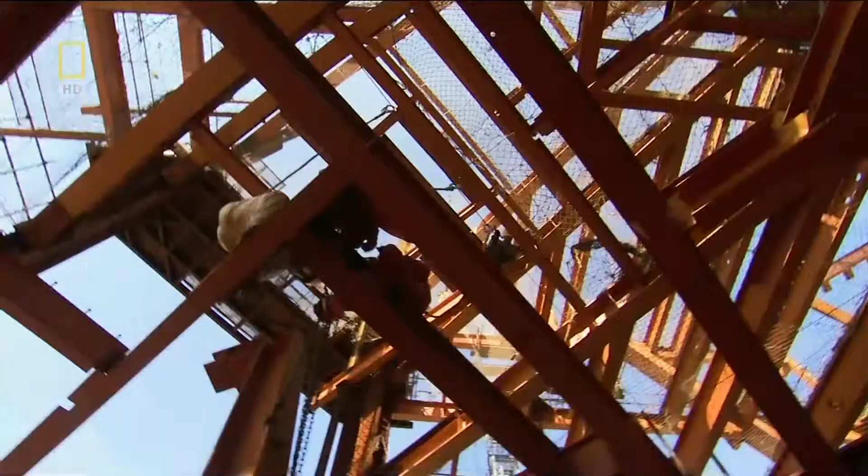Take 60,000 tons of steel, 260,000 cubic meters of concrete, 2,000 dedicated Chinese workers, and some of the best design brains in the business. And this is what you get. The Shanghai World Financial Center. Nearly 500 meters tall, and every meter state-of-the-art.

Designed to be strong enough to stand up to killer typhoons and powerful earthquakes, and to withstand the ultimate threat, by a world-renowned engineer still haunted by his most famous building's horrifying fate. I don't think I ever got through the experience of 9/11. When this megastructure's finished, the world will marvel at a skyscraper like no other, a dazzling icon of China's rise to power.

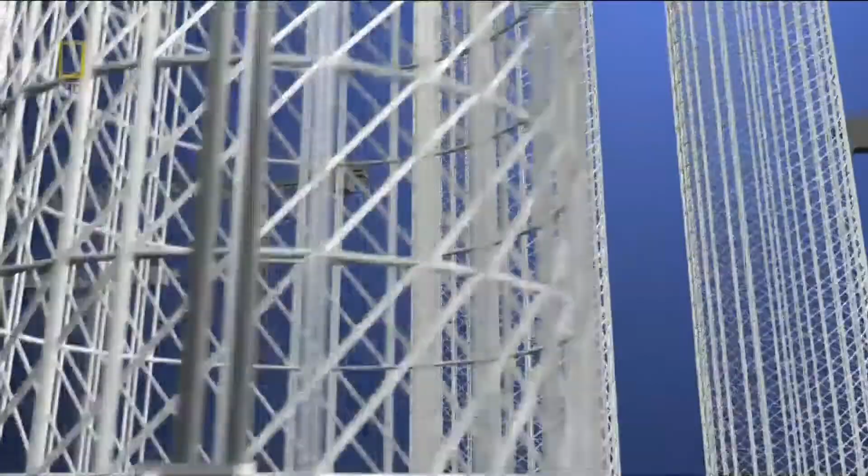China, the world's fastest growing economy. Shanghai, China's biggest city, the financial heart of its economic miracle. Along the Huangpu River, grand old buildings evoke the jazz age of the 1920s, when foreign powers had made Shanghai their Asian financial headquarters. And Shanghai's highest building was just 9 stories tall. That was then. This is now.

Welcome to Pudong, Shanghai's hottest real estate, ground zero of China's economic clout. A forest of skyscrapers proclaiming Shanghai's drive to become Asia's financial capital. Pudong's icon, the Jinmao Tower, a state-of-the-art office building and hotel completed in 1998. 88 stories high, 5th tallest building in the world.

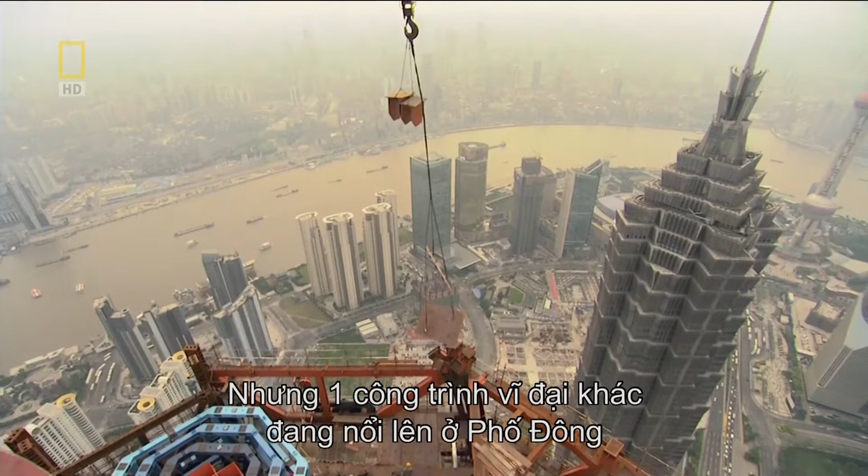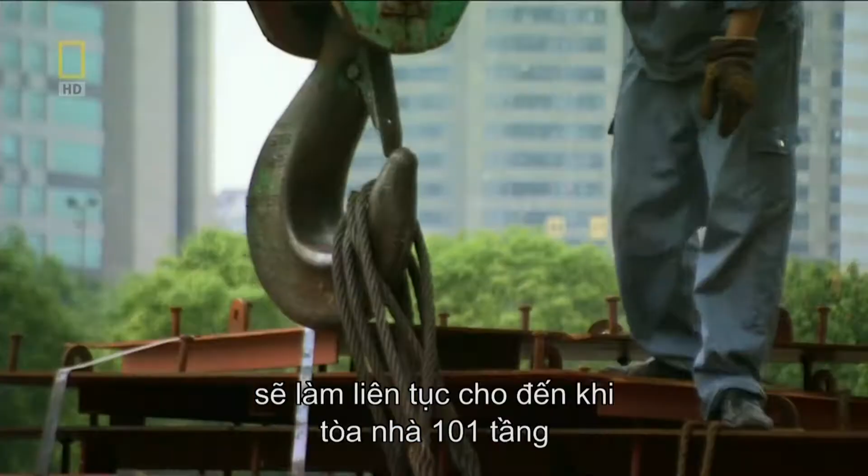But there's a new megastructure rising on Pudong's block. It's not even finished, but already it's putting the Jinmao Tower in the shade. 2,000 workers are toiling day and night to build the Shanghai World Financial Center. And they won't stop until it's 101 stories tall, soaring nearly 500 meters into the sky. The tallest building on the Chinese mainland, and the 3rd tallest building in the world.

17,000 people will work inside its 70 office floors, topped by a 14-story luxury hotel, and crowned by the world's highest observation deck. Building anything this big is not for the faint of heart. In New York, some of the world's best architects and engineers forgot about sleep and tackled the toughest challenges planet Earth can throw at a skyscraper. And even deadlier human threats.

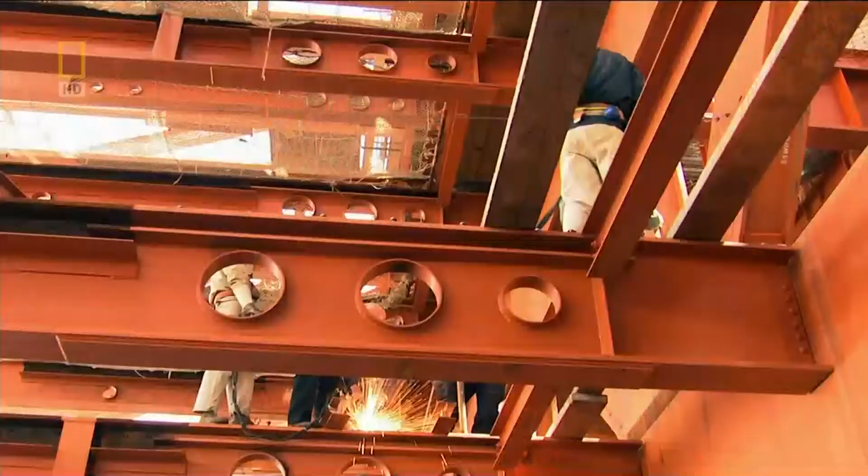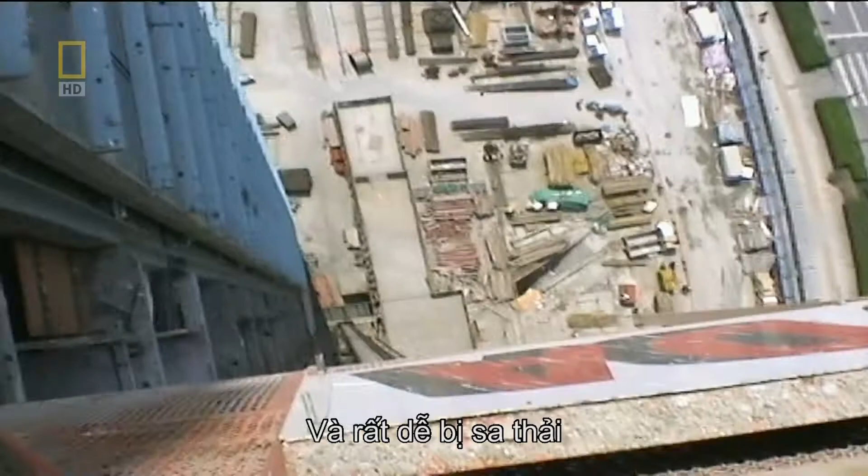Now, in Shanghai, a team of construction workers is turning the designer's vision into a reality. It's early morning, but construction isn't starting because it never ends. On this site, work goes 24/7. These workers are just the day shift, and their commute is not for the timid. The only way to get to work is in lifts bolted to the outside of the building. It's a great view, if you don't mind looking down.

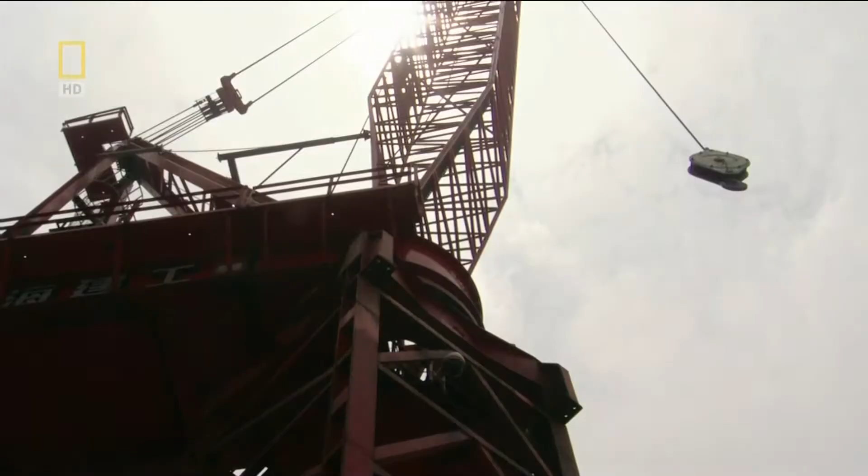Heights don't bother this man. Chen Shuifu works even higher than the top floor workers. 40 meters higher. He runs the Favelle Favco M900D, one of the most powerful high-rise construction cranes in the world. Without Chen Shuifu and his crane, this megastructure would still be a hole in the ground.

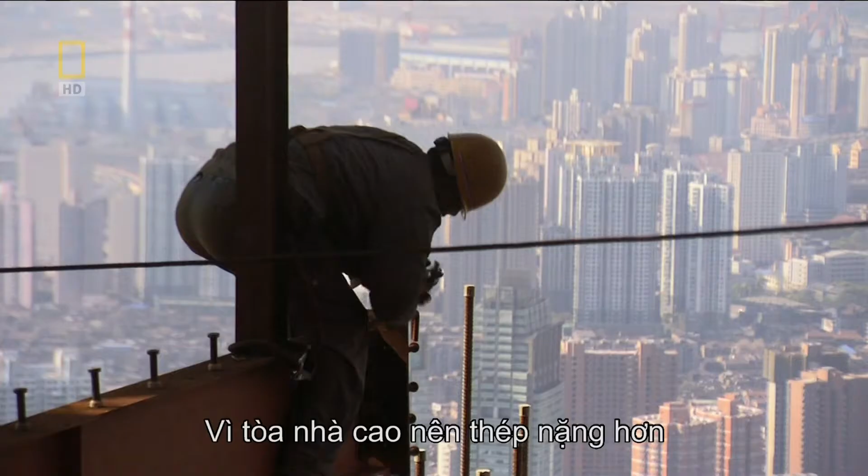Because building it starts with steel, lots of steel. It takes 650 tons to build just one floor. That's the weight of 90 elephants. Multiply that by 101 floors, and you get over 65,000 tons of steel. That's 10 times heavier than the Eiffel Tower. And as the building gets taller, steel has to go higher, a lot higher.

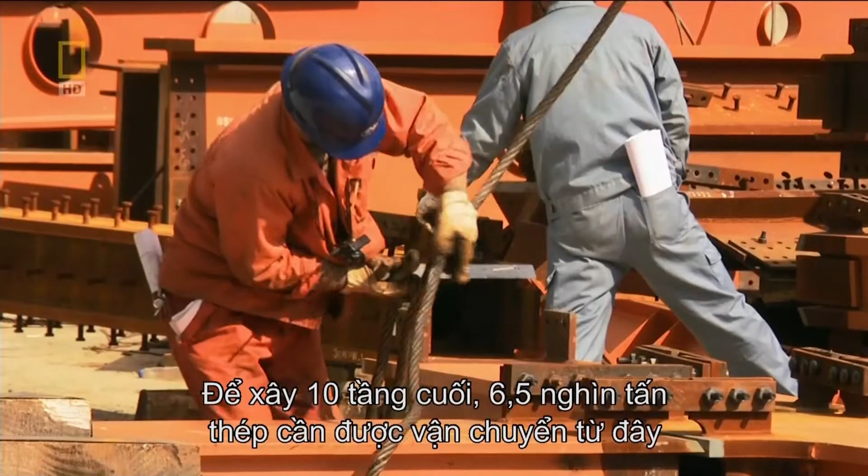Construction's now past the 400-meter mark. Up to the 91st floor, only 10 floors short of the top. To build those final 10 floors, 6,500 tons of steel need to get from here to there. And that's where Chen Xuefu comes in. He and his fellow crane operators hoist multi-ton beams over 400 meters. Their shifts run day and night, and no one ever knocks off early.

The World Financial Center is the biggest project I have worked on. Usually we start work at 6 a.m. We bring some bread and noodles for lunch. We finish work at 6 p.m. So we work a total of 12 hours a day.

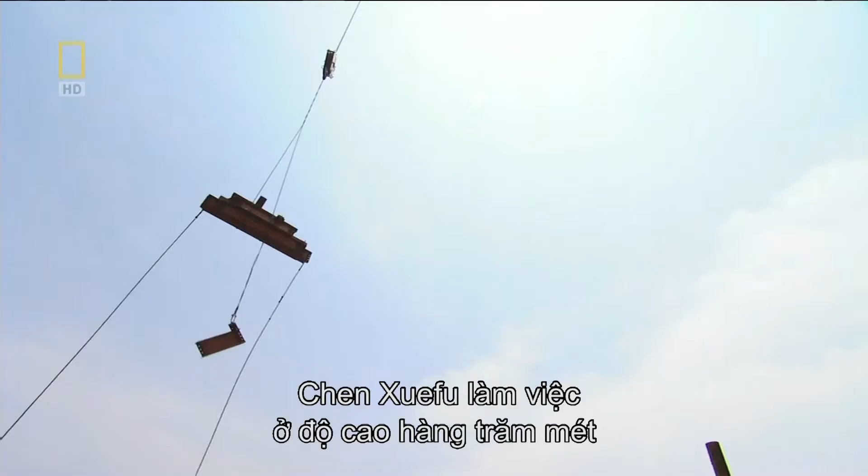Now that the financial center's over 90 stories high, Chen Xuefu does his job hundreds of meters in the air. But when construction started, he worked just above street level, his crane anchored to the basement. How does a 250-ton crane stay higher than the skyscraper it's building? That's one of the most amazing things about the M900D. This mega crane doesn't just lift enormous beams of steel. It can also lift itself.

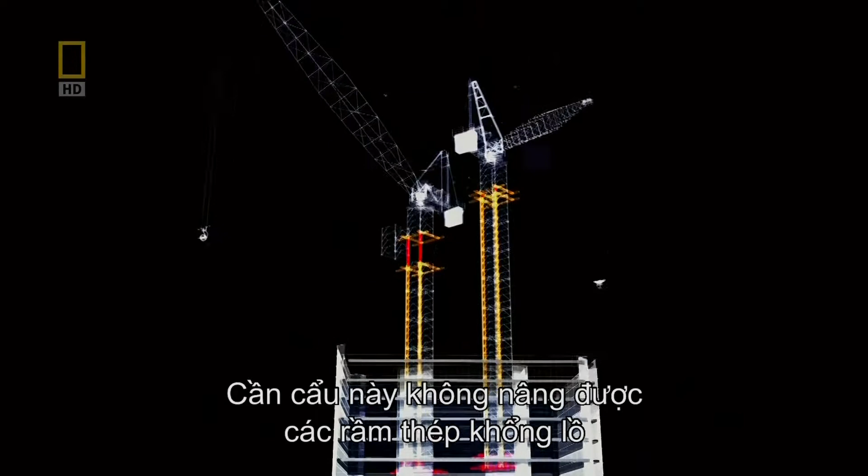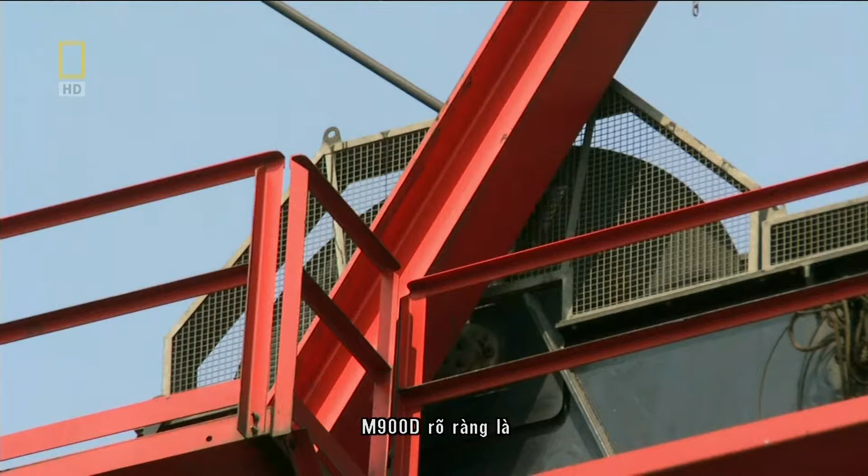As the building rises, it rises too. By jacking up its tower with powerful hydraulic rams and inserting new tower sections. To do that, those jacks have to push a 250-ton crane 40 meters straight up. But to work at these heights, a crane needs to be more than just strong. It has to be fast and smart. The M900D definitely fits the bill. These cranes don't flinch at lifting 32-ton loads 400 meters up at 36 meters per minute.

In fact, 400 meters is child's play. The M900D's hook hangs from a wire rope that's 750 meters long, the length of 10 jumbo jets. And this crane has a brain. Its drive system knows when there's nothing on the hook and gives the okay for the hook to go full speed to the ground.

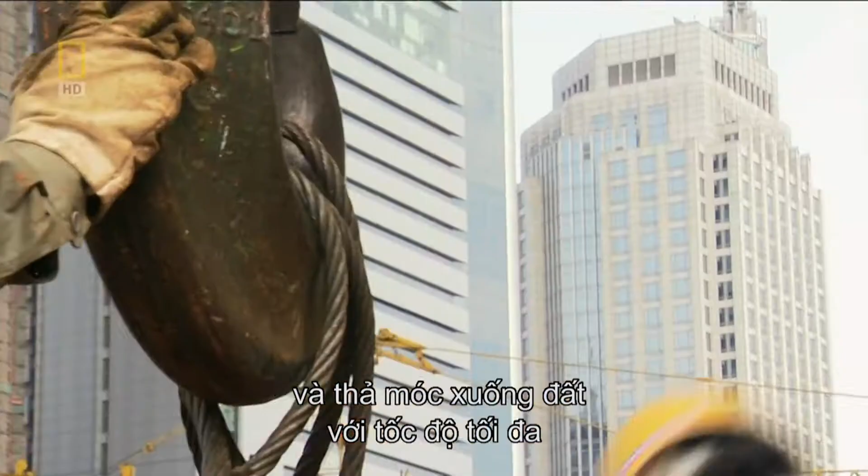When the hook's got a full load, it's a different story. The motor switches to full power and pulls huge hunks of steel hundreds of meters above the ground. Every time he lands a beam safely on top, Chen Xuefu can relax for a moment. But the new arrival gives others plenty to worry about.

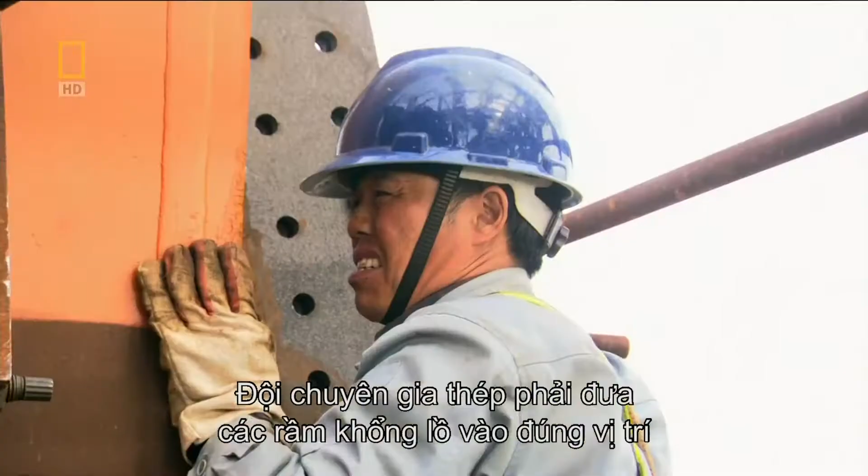A team of expert steelworkers must now wrestle the giant beams into place and bolt them together. One of those steelworkers is Zhang Shouliang. He spent years working at one of China's biggest shipyards, with both feet firmly planted on the ground. When he came to work at the World Financial Center, he found out fast that 400 meters up in the air, working with steel, calls for nerves of steel.

At the beginning, I was nervous, and my hands and feet were shaking. After a while, I managed to overcome it.

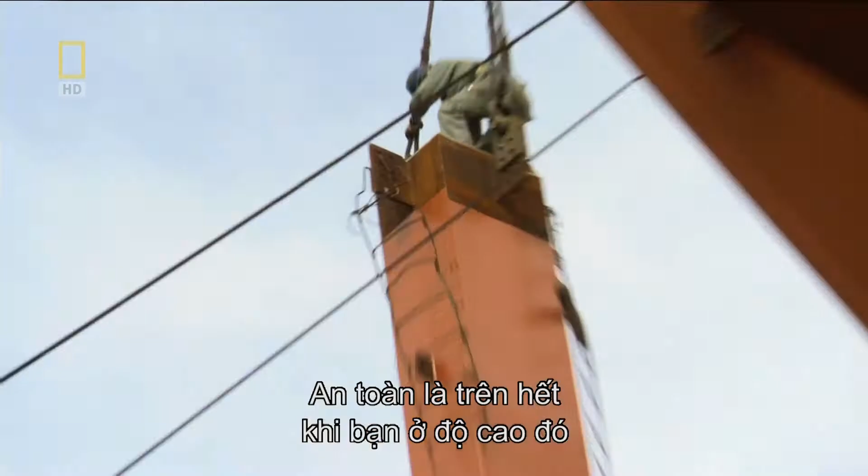To someone starting this job, I would say safety first on the first day. Be careful when climbing up and down the ladders and scaffolds. Safety is first and foremost for you at this height. Because only when you are safe can your family be happy. If you have an accident, your whole family will bear the consequences.

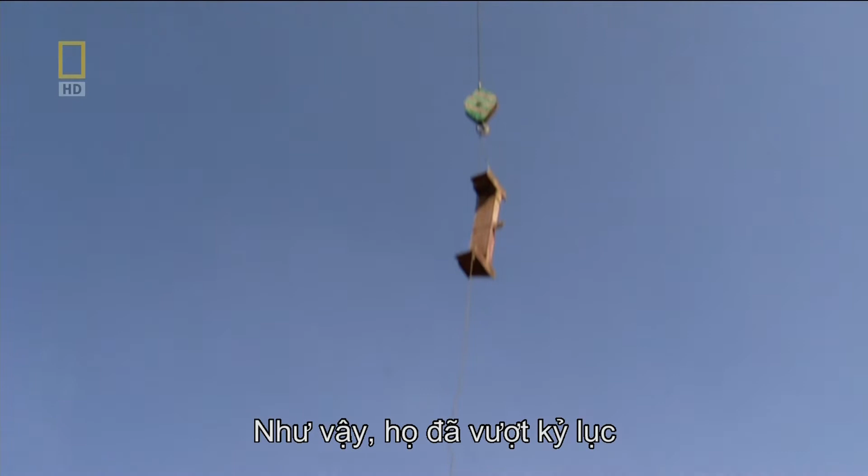As the workers pass 400 meters, they're heading into unknown territory. In mainland China, no one has ever built as high as they are going. And the Chinese building code stops at 350 meters. They're literally moving off the charts. And there's still nearly 100 meters to go. As they close in on success, it's hard to imagine how many challenges blocked their path, and that this magnificent structure once seemed doomed to fail.

1990. China's central government announces plans to transform an aging Shanghai suburb called Pudong into a gleaming financial center. And Japanese real estate tycoon Minoru Mori gets an idea. Mori envisions a mega building that will dominate the new Pudong skyline and rank among the tallest buildings in the world. To pay for his vision, Mori raises a whopping $625 million. To design it, he turns to some long-trusted associates, the world-renowned New York architects of Kohn Pedersen Fox.

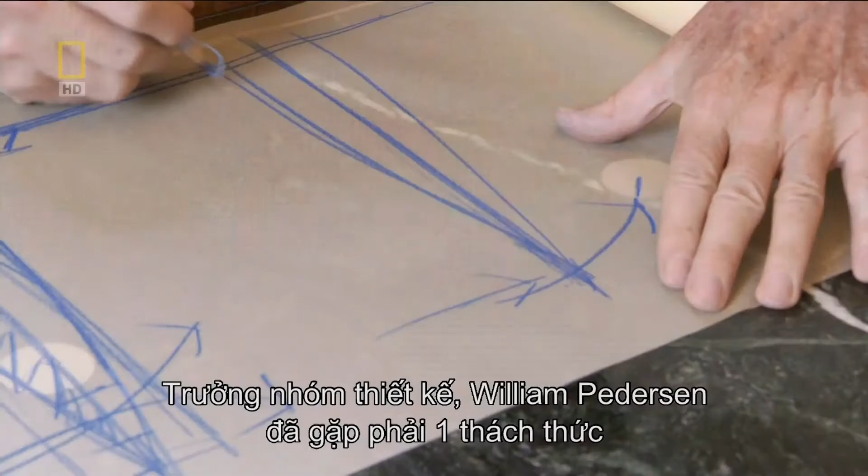Lead designer William Pedersen had a challenge on his hands. This was going to be a super tall building which had to deal with the very interesting issues of the connection of earth and sky, which a tall building has to do. It needed to be a building of great nobility. Pedersen discovered that in ancient Chinese culture, earth was square and sky was round. His design blended both shapes into a soaring 101-story prism of steel and glass, lifting the eye and the soul from the earth to the heavens.

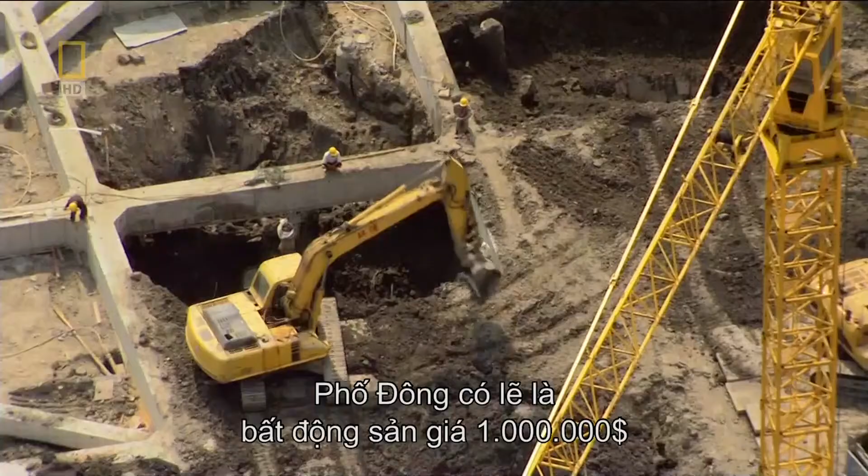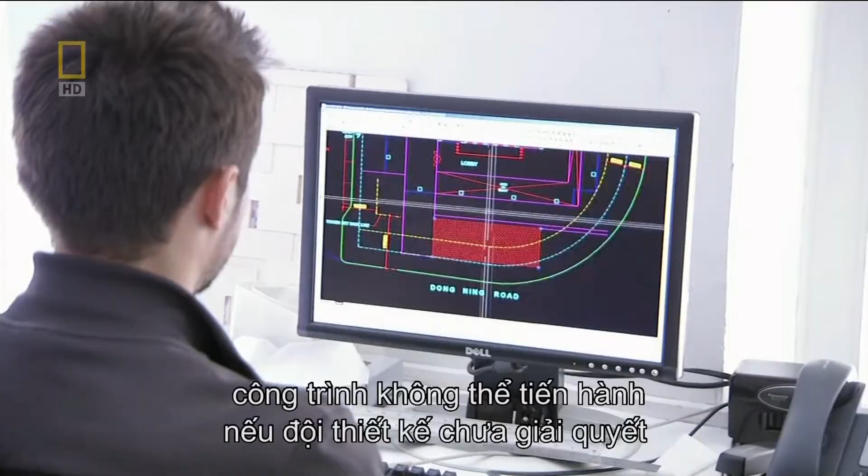It was lovely, but no one could build it until its designers solved one big problem. Pudong may be million-dollar real estate, but it's also a very bad place to build a very tall building. River water saturates its soil, turning it into unstable mud. When building crews pump the water out, the land sinks. Since 1920, parts of Shanghai have sunk almost 2 meters. At Kohn Pedersen Fox, senior designer David Malott knew construction couldn't proceed until the design team successfully grappled with Pudong's less than ideal geology. Shanghai is all alluvial soil, so there's not quite the bedrock that you would find in Manhattan. Manhattan, you go down one floor and then you're sitting on granite.

The team's solution: if they couldn't build on granite, they'd use a simple but effective device to anchor their skyscraper in mud. Friction piles. 2,000 steel rods driven 80 meters into Pudong's swamp. The deeper the piles push into the mud, the harder the mud pushes back, gripping the rods tightly, creating a stable foundation. Floating the World Financial Center like a ship on Pudong's waterlogged soil.

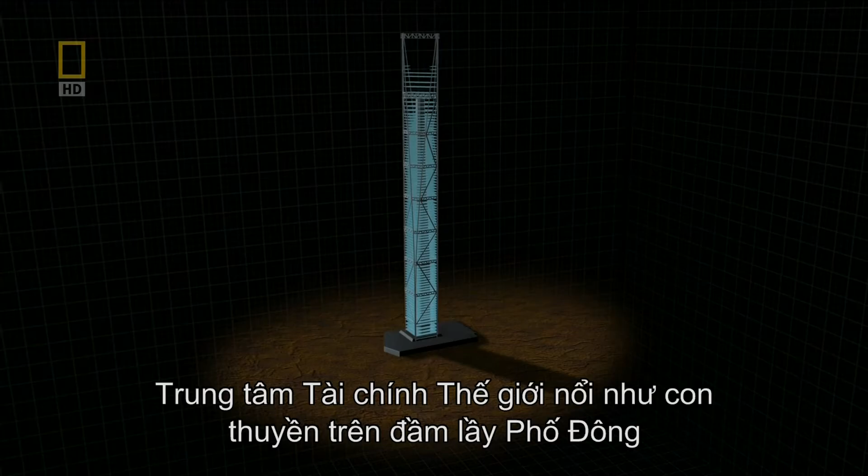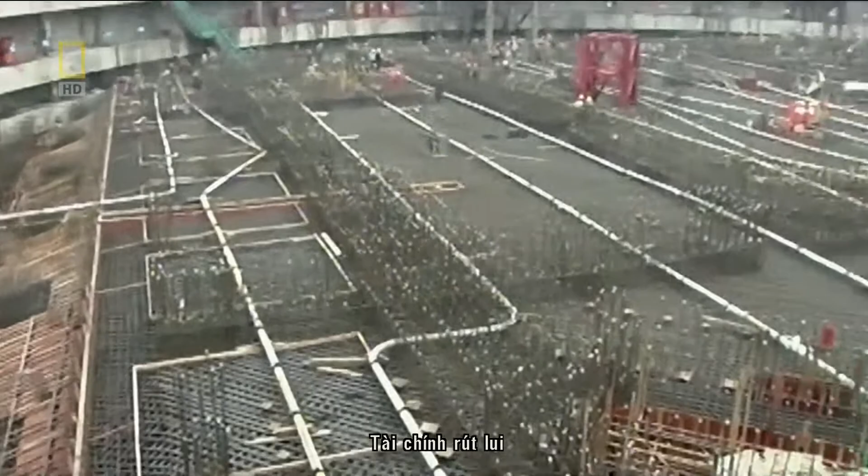1997. Construction of the Shanghai World Financial Center begins. But no sooner is the foundation finished than disaster strikes. 1997. Asia's overheated economies collapse. The meltdown paralyzes the Japanese banking system and suddenly floods the Asian real estate market with unoccupied office space. The last thing China needs is a $625 million empty office building. Some of the financial center's investors pull out. Construction grinds to a halt. 5 years pass. What was to be the pride of Pudong appears destined to remain a gigantic hole in the ground.

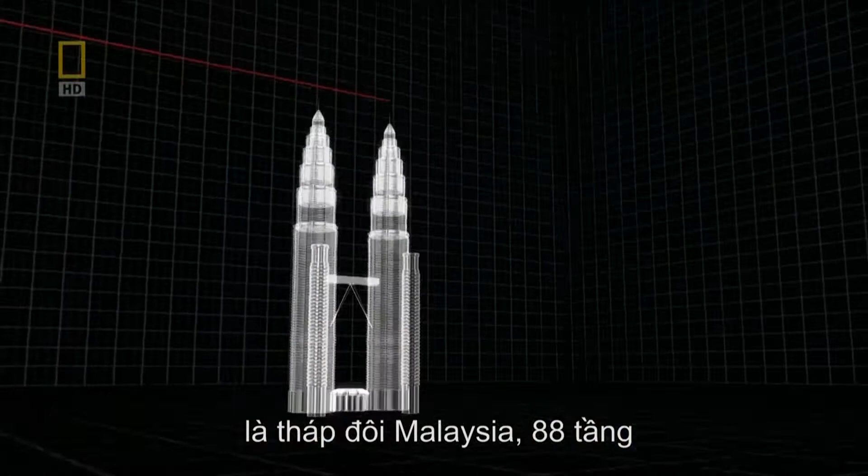But by 2003, Asian economies are roaring back. Minoru Mori finds new investors for his mega building. In New York, the financial center's architects get another call. The good news, their masterpiece is back on track. The bad news, its design no longer works. When construction started in 1997, the world's tallest building was Malaysia's Petronas Towers, 88 stories high. The 95-story World Financial Center was on track to take the title.

But by 2004, a new skyscraper, Taiwan's Taipei 101, soared 101 stories, or 508 meters, above the Earth. Minoru Mori told his architects, Shanghai's tallest skyscraper must rival Taipei 101. No problem, except the World Financial Center's foundation was already built to support only 95 stories. Adding 6 more stories meant extra weight pressing down on a foundation that couldn't support it.

And that wasn't all. China was now the host of the 2008 Olympics. Minoru Mori didn't just want a taller building. He wanted it finished before the world turned its eyes on China in 2008.

In New York, senior designer David Malott went back to the drawing board and stayed there well past closing time. You have to be 100% dedicated to the task, for sure. Across town, legendary structural engineer Leslie Robertson and his team rolled up their sleeves and went to work.

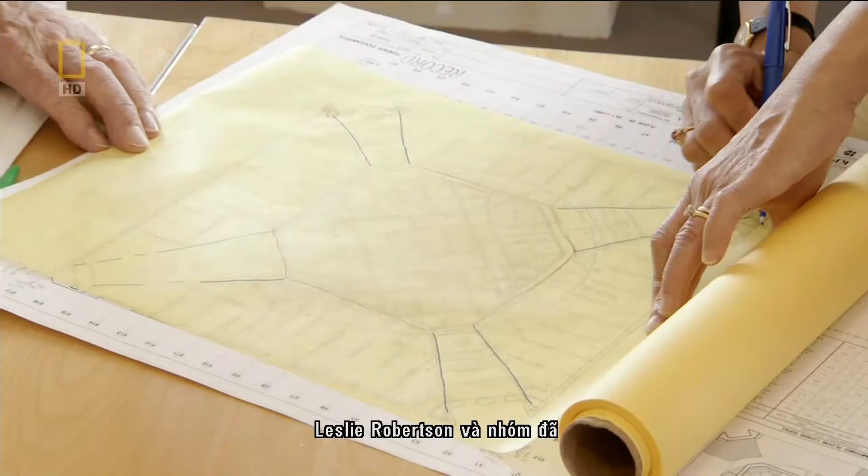Our challenge was to come up with a building that was larger, taller, so it needed to be stronger and it needed to be lighter. It had to stand on those existing foundations. Robertson's larger, taller, lighter solution was an engineering triumph.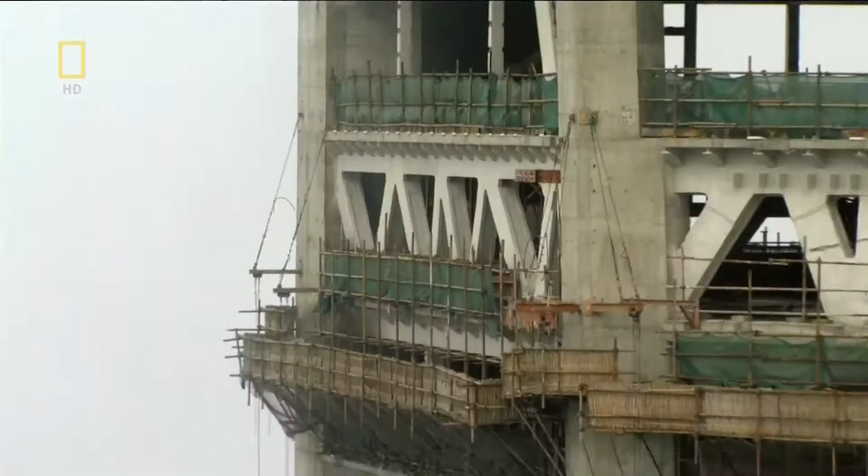Its secret, modular design and the outrigger truss, steel beams radiating out from a concrete core. Attached to a diagonal braced frame, a modular design requiring less steel to build, and repeating itself every 12 stories.

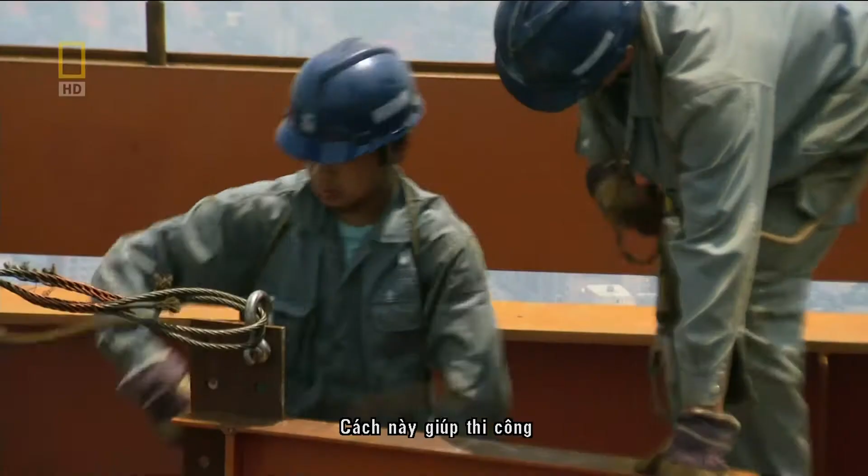What looked like a single 101-story building would actually be a series of 12-story buildings stacked on top of one another. Easier and faster to build, giving the builders a shot at finishing before the 2008 Olympics. So this way we got faster construction and more economical construction while maintaining structural integrity, robustness, and all those good things.

June 2007, 4 years after construction restarted. Thanks to its modular outrigger truss design, workers are building the World Financial Center at a rate of 1 floor every 3 days. At the top, the steel crew bolts in floor plates, completing the skeleton of the 91st floor.

Meanwhile, the cranes are lifting a much lighter, but critically important, load to the 90th floor, where another team begins the back-breaking task of installing 10-meter lengths of rebar over the steel floor plates. Rebar stands for reinforcing bar, and it's used in buildings all over the world to reinforce concrete.

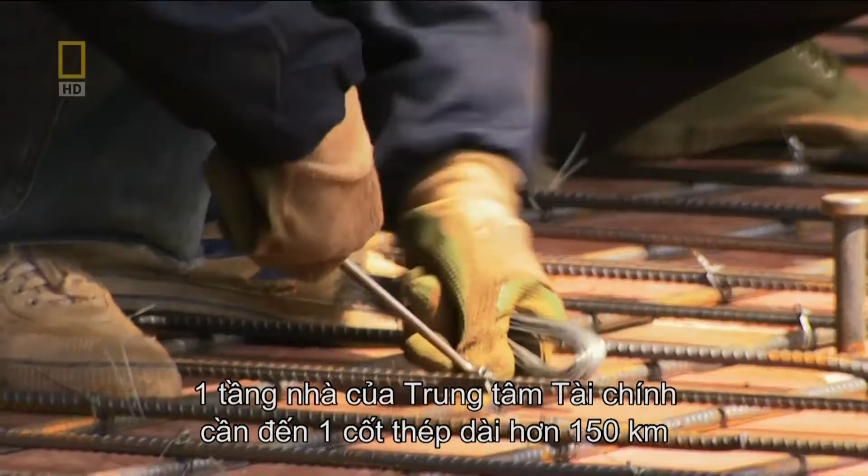It takes over 150 kilometers of rebar just to cover one of the financial center's floors. That's over 15,000 kilometers for the whole building. If you laid that much rebar end to end, it would reach to the International Space Station and back 19 times. Next step, pour the concrete.

90 floors below, what looks like a giant praying mantis seems ready to attack the World Financial Center. In fact, it's a concrete pumping machine. When the rebar's ready, workers 400 meters high will need massive amounts of concrete pumped up to them.

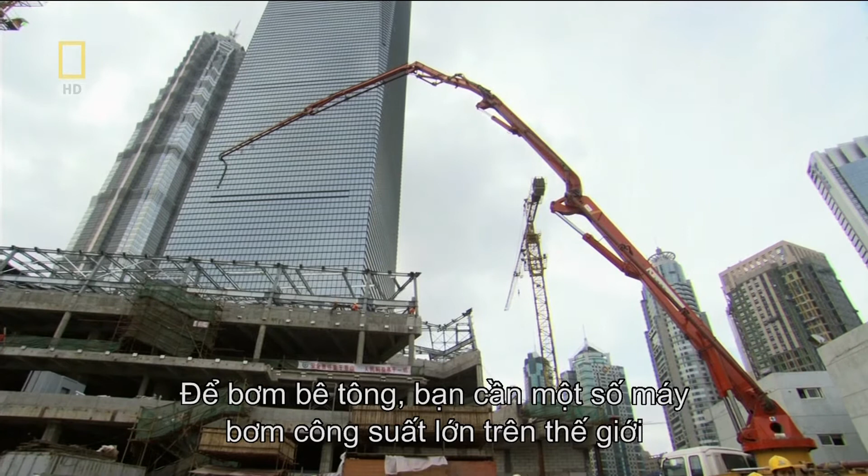To pull that off, you need some of the most powerful concrete pumps in the world. And believe it or not, this monster isn't one of them. It can only pump concrete as high as its arm can reach, close to 40 meters. The real action starts after dark, when concrete trucks line up to feed 3 small machines.

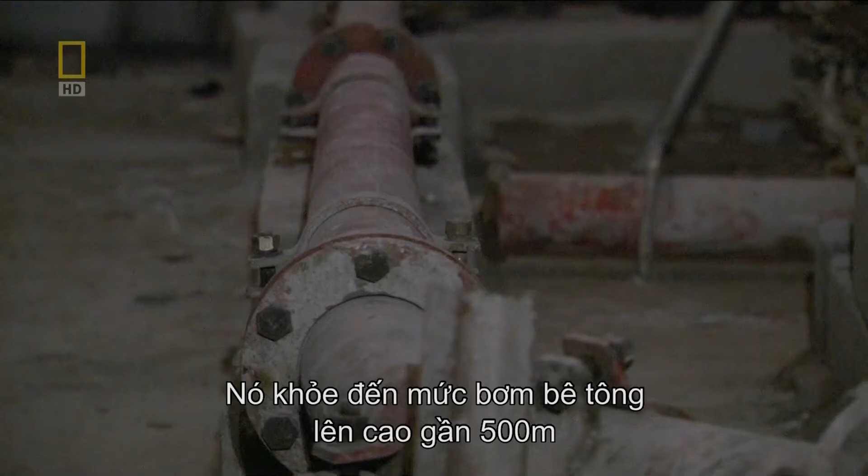They don't look like much, but these pumps are the real deal. So powerful, they can shoot concrete nearly 500 meters into the air through this pipe that runs across the bottom of the building and then straight up to the 90th floor. When these pumps fire concrete skyward, it sounds like one unhappy dinosaur.

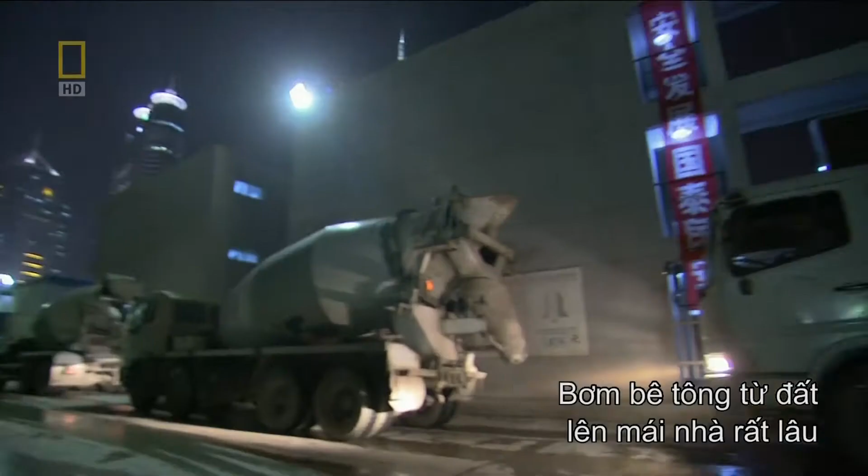When it pours out on top, the concrete crew breathes a big sigh of relief. And so does Deputy Manager Bernie Wren. Pumping concrete from the ground to the top of the building takes a long time. And if we don't mix it right, the concrete will set inside the pipe and we'll waste a lot of time searching for the blockage.

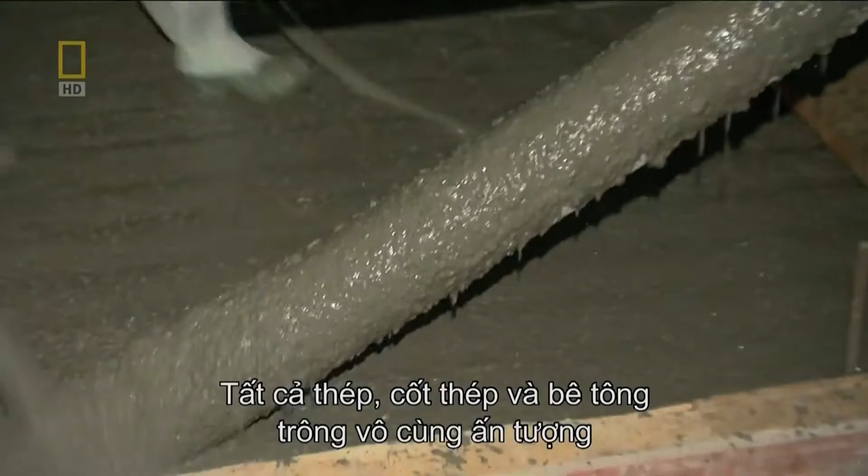You could fill an Olympic-sized swimming pool with the amount of concrete that covers just one financial center floor. For this crew, midnight is only lunchtime. They started at dusk, and they won't be done till dawn. All this steel, rebar, and concrete looks mighty impressive.

But will the redesigned World Financial Center really be strong enough? Geologically speaking, it's in a pretty rough neighborhood. China is one of the world's most dangerous earthquake zones. Shanghai isn't the riskiest seismic area, but a strong earthquake could shake Pudong's waterlogged soil until it liquefied, and even well-anchored buildings could collapse, as dozens did during Japan's devastating Kobe earthquake, which struck just over 1,300 kilometers northeast of Shanghai.

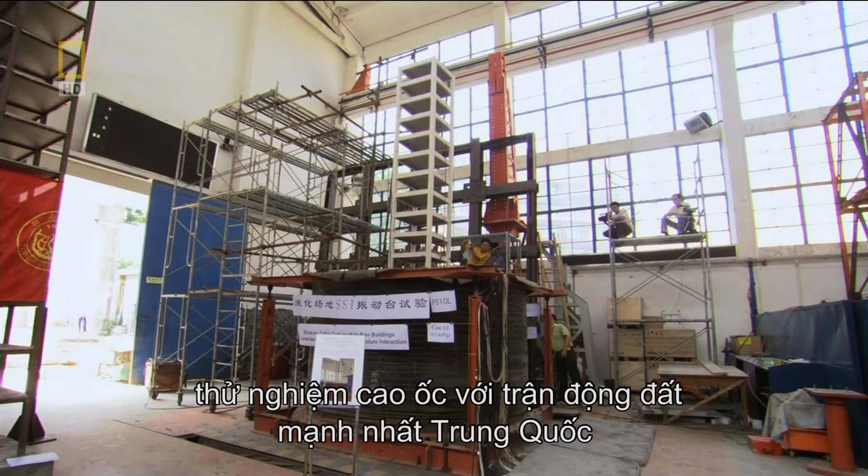The financial center's new design had to satisfy this man. Professor Lu Xilin of Shanghai's Tongji University. He and his team of engineers run China's largest seismic shake table, subjecting scale models of skyscrapers to massive simulated earthquakes to see if they'll survive.

All of these structural systems are new. They had never before been used in the construction of a building reaching 492 meters. Not only that, the size and structure of this building all exceed the limits of the current Chinese design code. So detailed and specialized analysis needs to be carried out.

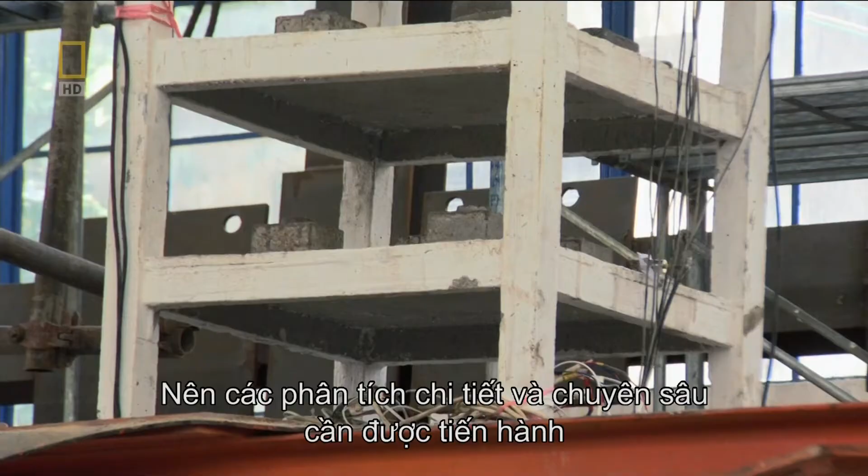For 3 days in 2004, Professor Lu and his team hit a model of the Shanghai World Financial Center with a simulated magnitude 7 tremor, almost as strong as the Kobe earthquake. If it failed, construction might have to halt, while the Olympic countdown clock kept on ticking. Through detailed analysis and experiments, we have concluded that this building can sustain a 7-degree earthquake.

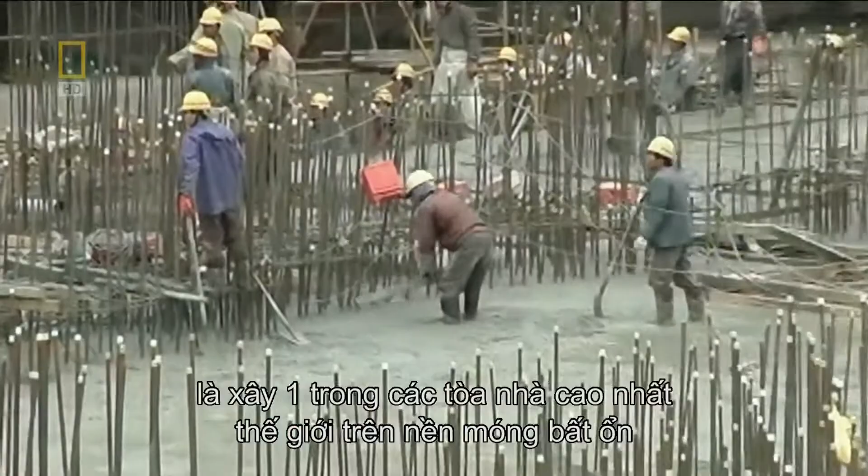Architects and engineers met the challenge of putting one of the world's tallest buildings on a foundation that wasn't built to hold it. But there were still plenty of challenges to come. After the steel, rebar and concrete, you'd think the toughest parts of building this megastructure would be over. But one of the hardest jobs of all can't even start until they're done: installing 10,000 windows.

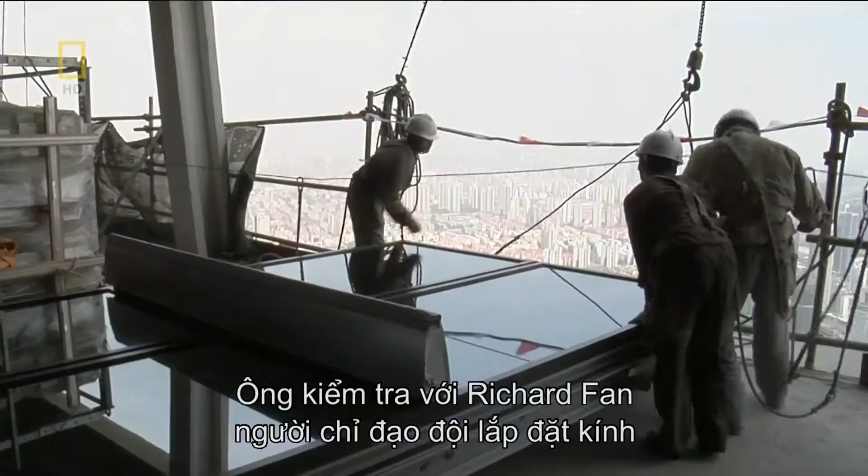Deputy Manager Bernie Wren wants to know how the window work is going. He checks in with Richard Fan, who heads the installation team. Designing the windows for this building was relatively simple, but installing them is difficult. There isn't enough room to store so many windows on every floor, so we have to get them in place as quickly as possible. On average, the group can install about 15 windows per day. We complete one floor every 3 to 4.5 days.

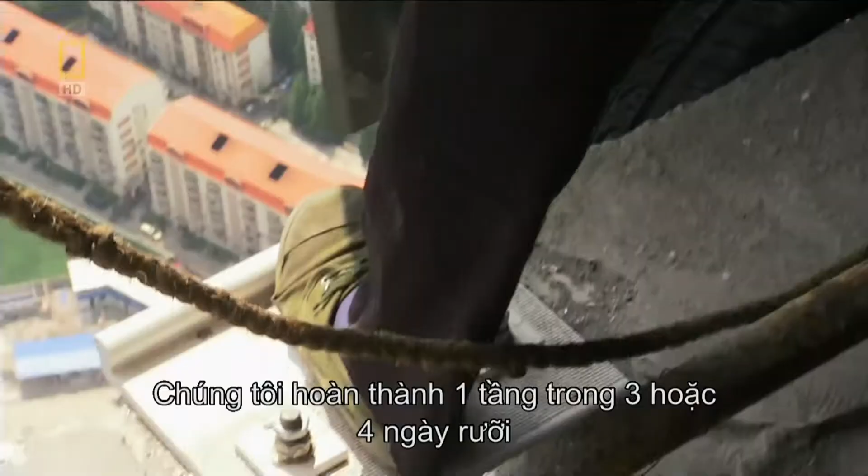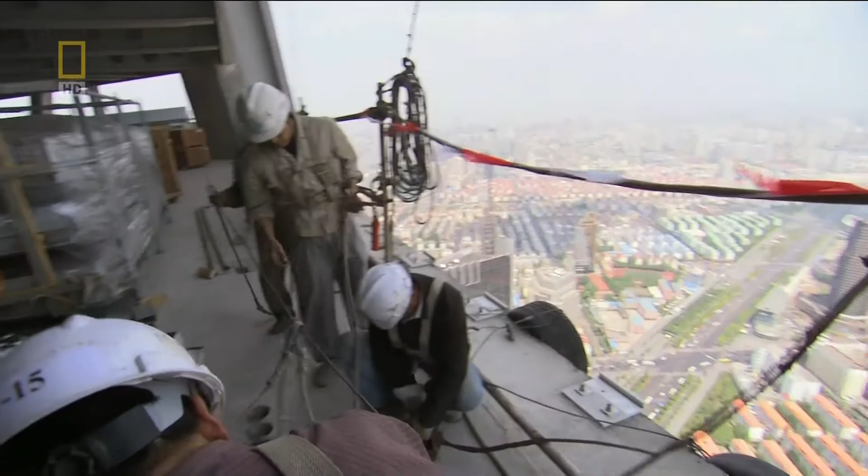World Financial Center windows are taller than a basketball hoop and weigh as much as 3 grand pianos. At these heights, wrestling with weights like that can be dangerous. A crane hoists every window unit from the ground, and work teams position and bolt them into place. Not just anyone can do this job. A highly trained team of 130 workers specializes in installing these massive windows. Job hopefuls with altitude issues need not apply.

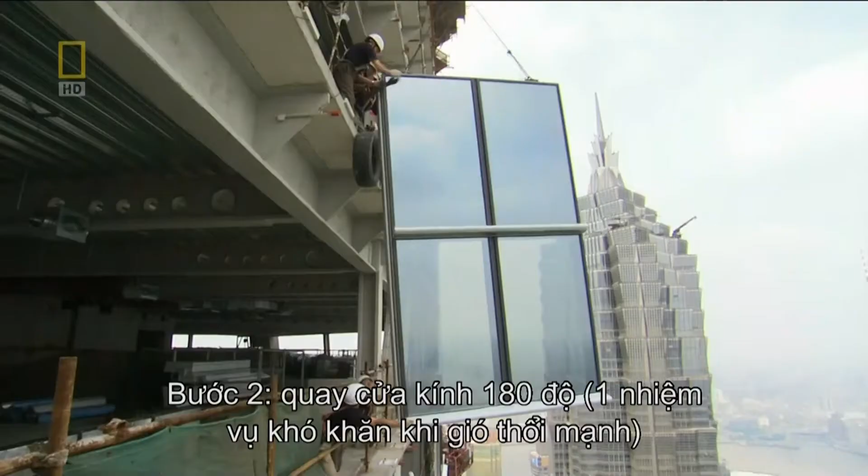Step 1. Attach the frames to a winch, then slide them out over the side. Step 2. Turn the window unit 180 degrees. Not an easy task if the wind is blowing. Step 3. Workers suspended on the side of the building help ease the window down to the floor below and bolt it to brackets already in place. Step 4. Repeat steps 1 through 3, 9,999 times.

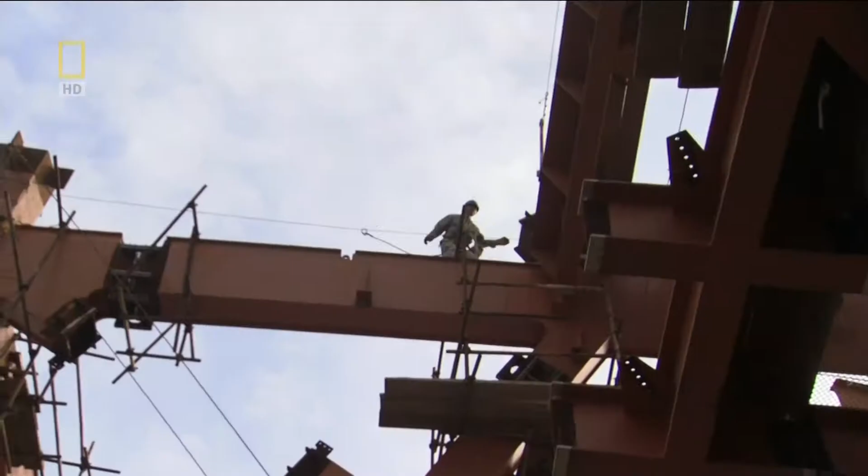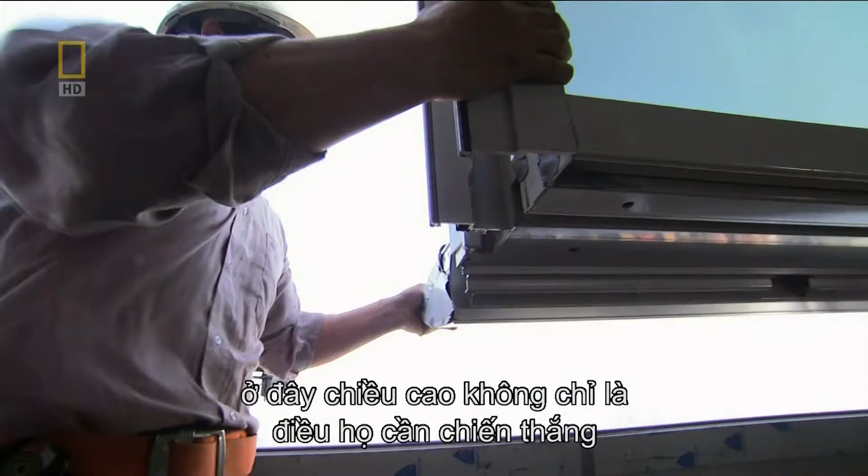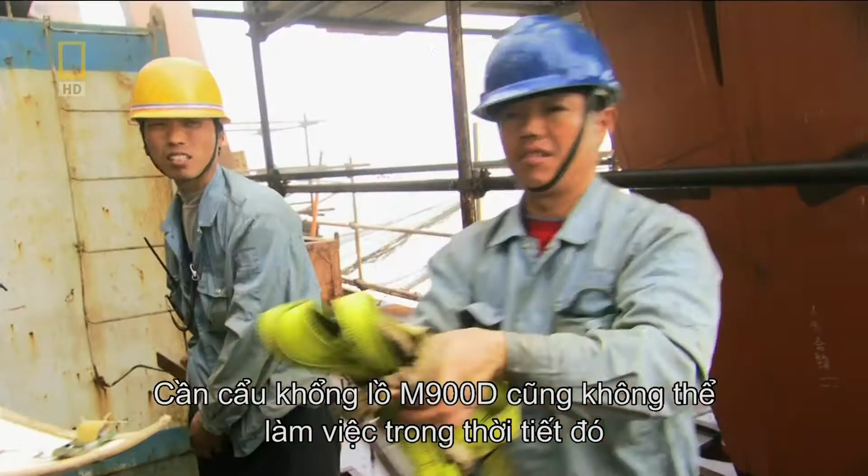Meanwhile, workers at the top are building towards 500 meters, entering a realm where only a few of the world's very tallest buildings have dared to soar. Up here, it's not just height they have to contend with. They're in a world with a climate all its own. And they're more often in the clouds than above them. There are days when nature closes in and visibility drops to nearly zero, making work at the top floors too dangerous. When the wind gets too strong, work grinds to a halt. Even the mighty M900D tower cranes can't work in this weather. And even daredevil steelworkers like Zhang Xiaoyang make a hasty retreat back to terra firma.

When you are lifting and handling steel in a high rise, weather matters a lot. If the weather is foggy or windy, it will really affect the installation work. As you can see today, it is very misty, so we are stopping work for the day. When the weather permits, workers will go back up top and continue building the World Financial Center's crowning touch, which will also keep it safe against the deadliest threat to any building that dares to soar so high.

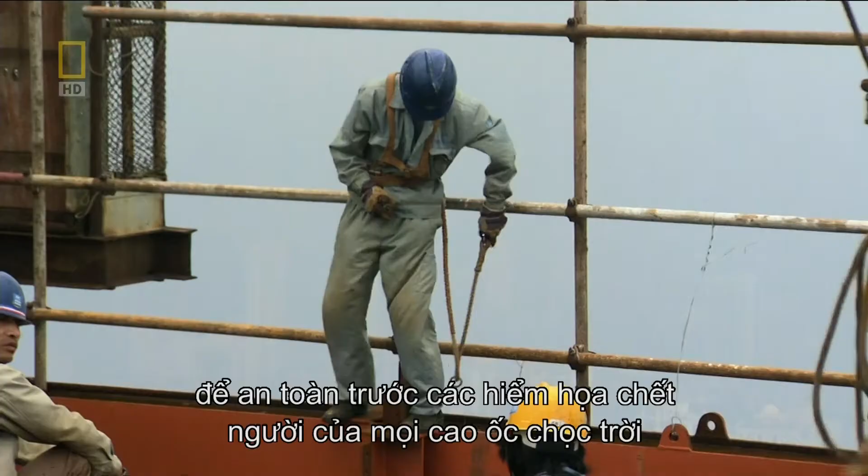At these altitudes, the number one enemy is wind. Typhoons slam into Shanghai almost every summer. In 2005 alone, winds from Typhoon Matsa peaked at over 150 kilometers per hour, causing $12 million of damage and killing 3 people. And clusters of skyscrapers can generate their own powerful winds. The taller the building, the greater the danger of wind pushing it over. A sudden event engineers call the overturning moment.

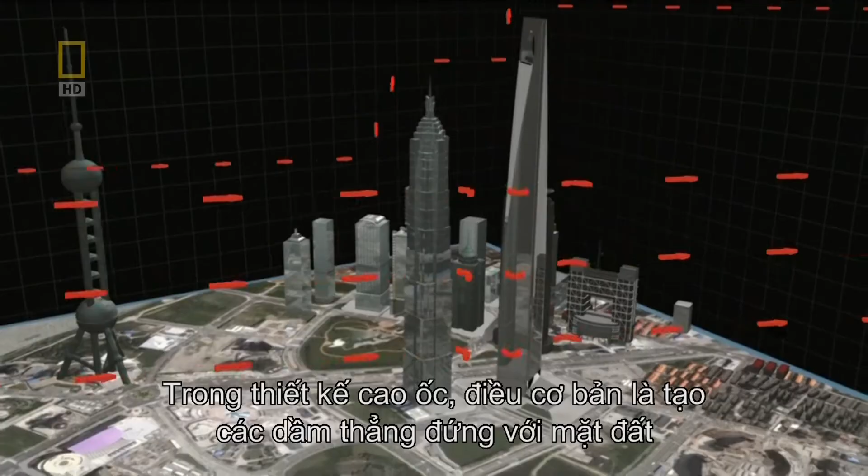In the design of any tall building, one is essentially creating a beam that's vertically projected from the earth. But the greater force for tall buildings is the actual overturning moment that is generated by the wind, which tends to want to push the building over. So how do you keep a 500-meter megastructure standing in a typhoon? You don't fight the wind, you let it through. The financial center's architects crowned its topmost floors with a gigantic circle 53 meters in diameter. A wind hole that would let winds through, preventing them from pushing over the building.

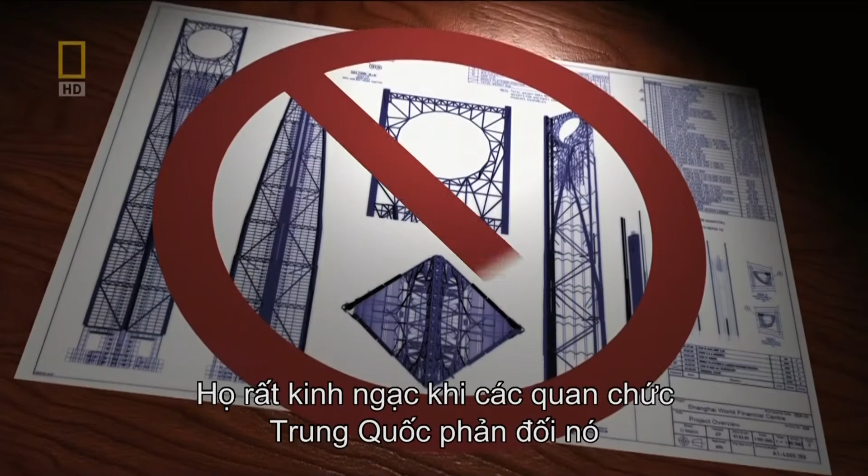In Chinese mythology, a circle was a symbol of the sun, the moon, and the heavens. The New York architects were proud of the elegant circle inspired by tradition, and were stunned when Chinese authorities objected to it. It wasn't until we read, I believe in a Hong Kong paper, when it said a Japanese developer is coming into Shanghai with the flag raised high. And then finally we got it. What the architects never thought of was that in China, a giant circle atop a Japanese finance building would be a symbol of something very different: Japan's 1937 attack on China, when her armies marched under the imperial banner of the rising sun.

For the design team, it was not a good day. We went to lunch, and we were served a live lobster. Well, for some reason or other, I felt as if this was enormously symbolic, because I felt, indeed, like I was the lobster.

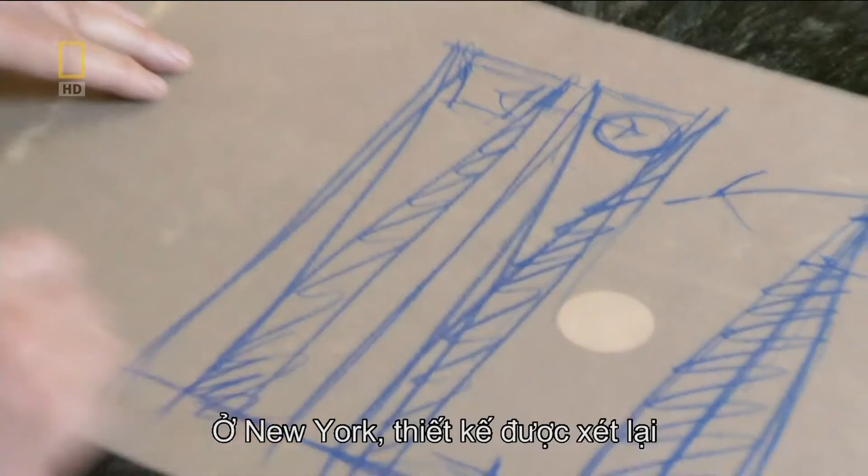In New York, it was back to the drawing board, and many sleepless nights for senior designer David Malott. I would be lying if I said it wasn't heart-wrenching when something you've been working on for years is suddenly changed overnight. The team bisected the circular wind hole with an enclosed walkway, offering visitors a chance to see the world from almost 500 meters up.

Engineers tested the new design in a wind tunnel. The wind hole passed with flying colors. But its modified design didn't satisfy the critics. The circle would have to go.

We changed it to a form which is more, I think, in line with the shape of the building's geometry at the top. And frankly, I'm very pleased with it, because I believe it relates more strongly to this particular building shape. And that's what's about to take shape on the 94th floor. A politically neutral wind hole, shaped like a trapezoid, that still offers visitors amazing views. The highest observation deck of any building in the world.

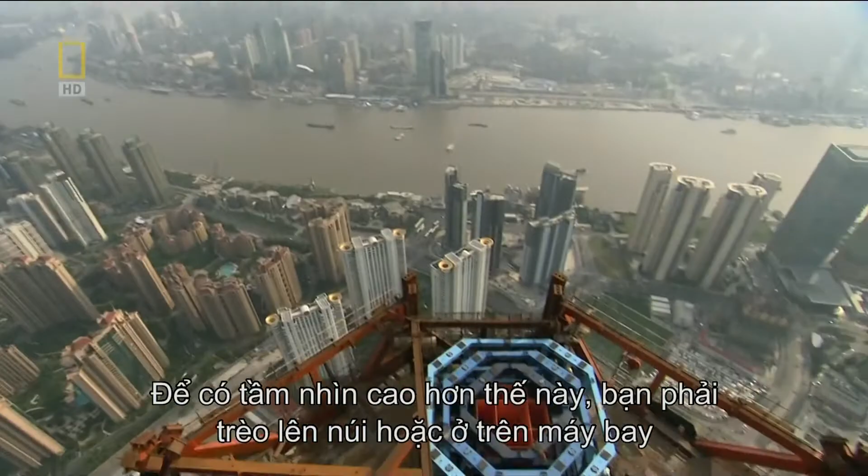To get a view higher than this, you'd have to climb a mountain or get into an aeroplane. But just like a mountaintop or an aeroplane ride, if the wind is strong enough, it can knock you around. In a building this tall, anyone on the topmost floors will definitely know when strong winds blow, or when an earthquake strikes. Winds and earthquakes create an effect called whiplash, which can sway a super tall building from side to side.

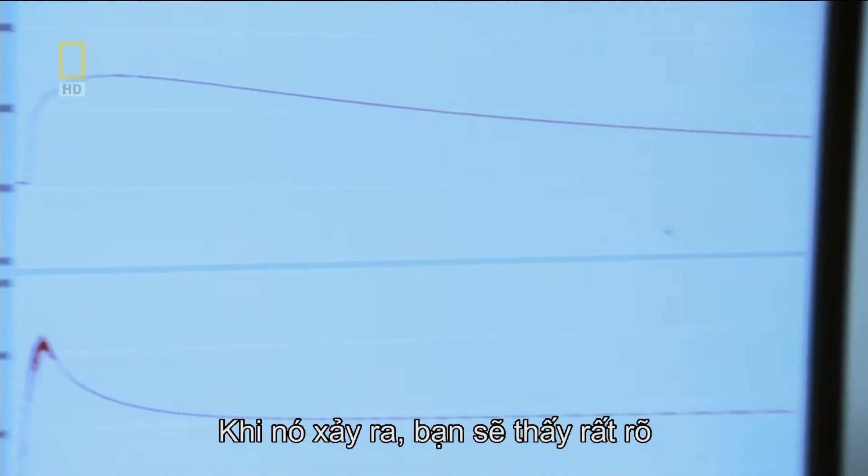This happens at the top of the building because the structure at the top is less stiff. The vibration is more intense. When it happens, it is very obvious. If you are at the top of the building when an earthquake strikes, the vibration at the top is very strong. But there is no threat to the safety of the building. However, the people at the top will feel very uncomfortable.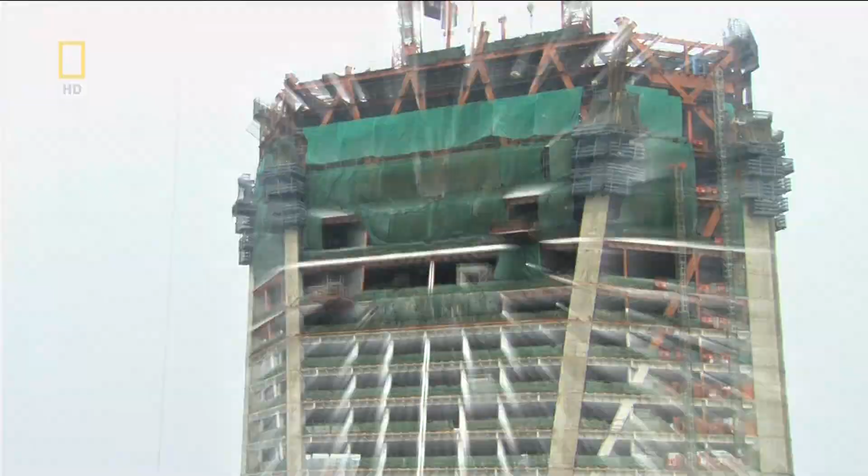But people atop the World Financial Center will hardly notice any whiplash, thanks to two active-tuned mass dampers installed on the 90th floor. These dampers counteract whiplash by pushing 150-ton counterweights in the opposite direction, reducing sway during high winds and earthquakes to just 1 meter.

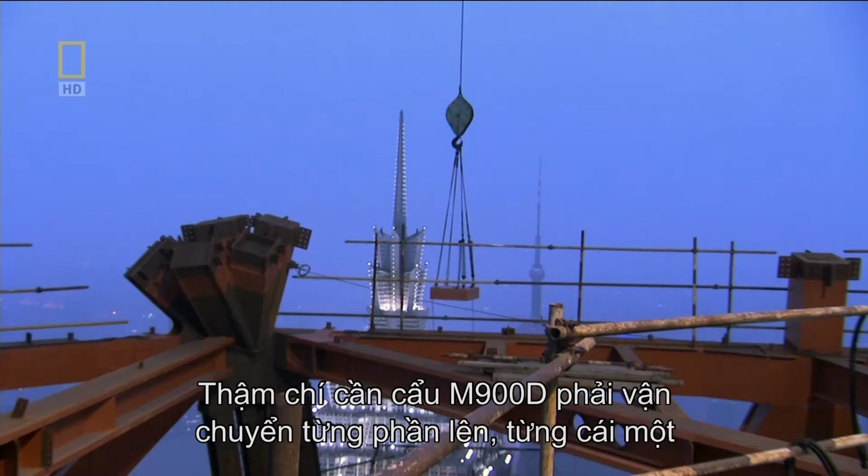But it's not easy getting weights that heavy up to the 90th floor. Even the mighty M900D cranes have to bring them up in pieces, one at a time, with the skillful crane drivers slotting them into the damper frames. It's a long, laborious task that goes all day and well into the night. The dampers will allow visitors to the top to enjoy the view in all kinds of weather.

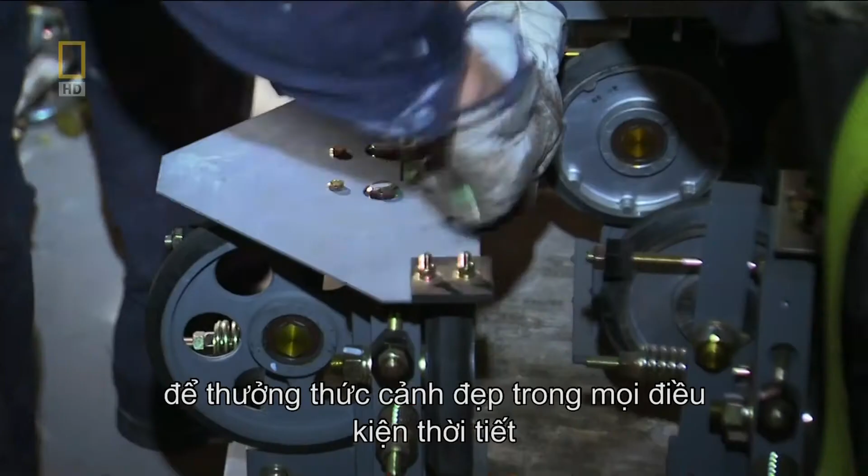And what these workers are installing will get them there. One of the most advanced elevator systems in the world. An amazing 91 elevators in all, many of them double-decked, that can whisk the 17,000 office workers and hotel guests anywhere in this mega building in only minutes. One can even lift luxury cars to auto shows on top of the world.

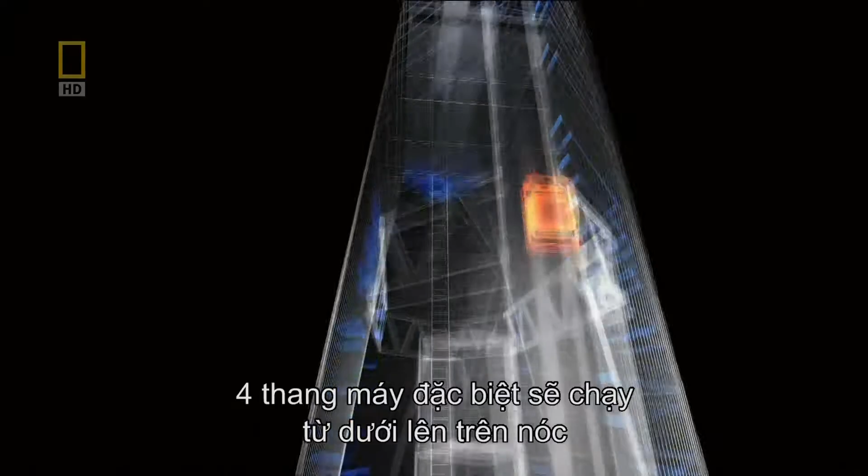We took one of the double-deck elevators and actually removed the intermediate floor. So you could take a car, turn it vertically within the elevator, and then go up and have your exhibition. Four special lifts will run from the bottom to the top, along the building's outside edges, giving visitors the ride and the view of their lives. But these outside lifts will also have a much more serious purpose.

Because in the 21st century, designing mega buildings to meet nature's challenges is no longer enough. Like all tall buildings, the Shanghai World Financial Center must now confront a new and horrifying threat. September 11, 2001. In Shanghai, the World Financial Center is a foundation waiting for a building.

Across the world in New York, engineers at Leslie E. Robertson and Associates, among them managing partner SawTeen See, begin a typical workday in their offices a few blocks from the world's 4th tallest building, the 110-story towers of the World Trade Center. I was in my office, beautiful day, and an engineer came running to me and said, a plane went into the Trade Center. And I thought it was one of those news helicopters that fly around here.

So anyway, we were here, and we all gathered around the windows in this conference room, looking at the building. And that's when we saw the second plane come by this way and just went straight into the building. That's when we realized it was not an accident. One horrifying day transformed the world's tallest skyscrapers from icons of power into potential death traps.

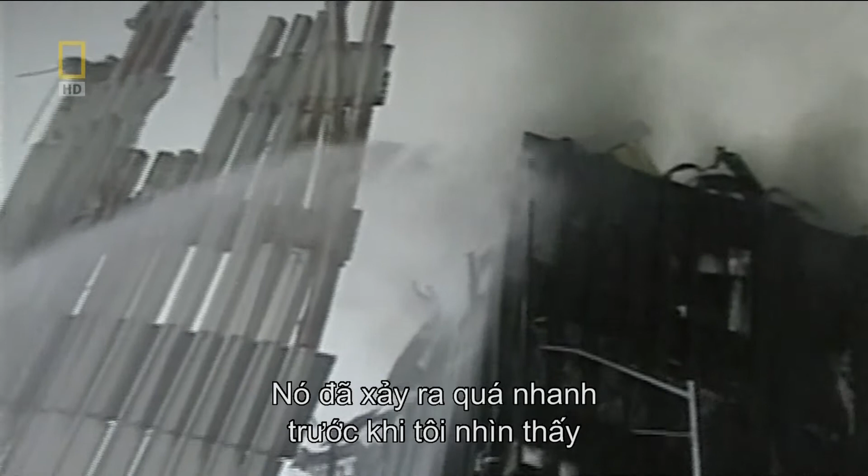I got back to New York and went to the site, and I guess I wasn't prepared for that. It took a while before I could even actually look at it. To this moment, I still think of all those people that I met, and they were looking for something that I just don't have. I think largely they wanted me to say that their husband or their brother or their father died like that. And I don't know. I don't think I ever got through the experience of 9/11. I mean, it's a problem with me today.

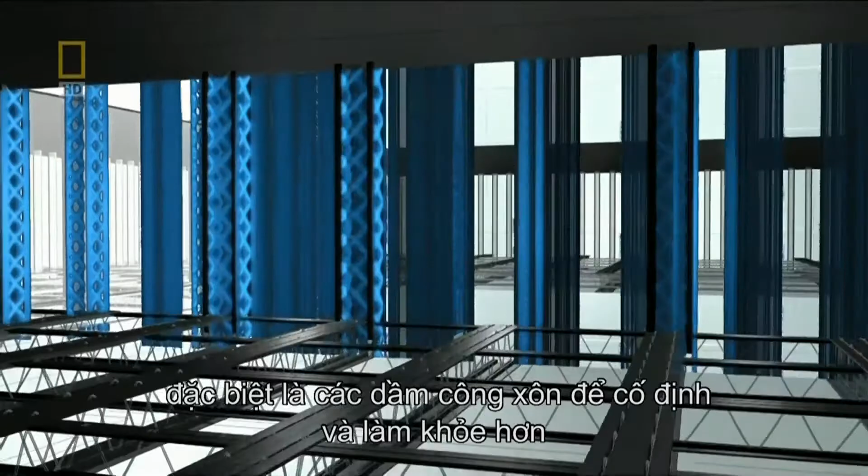Robertson redesigned the financial center, using some of the same innovative ideas he used to build the World Trade Center, especially the outrigger trusses and modular design that helped stabilize his lighter, taller building design while giving it extra strength. But the new design also made the World Financial Center a skyscraper for a post-9/11 world. We feel very confident that the project would sustain the impact of the aircraft that are flying right now.

What if the unthinkable happened and a fuel-laden jetliner smashed at top speed into the Shanghai World Financial Center? The impact area would be devastated, and the burning jet fuel would ignite an inferno. But the people inside the building would have options those inside the World Trade Center didn't have. In 9/11, the most frightening image for people is that the occupants above the fire really had no choice. They would either perish in the fire or they would choose to leap off. So I think that really affected us in a profound way.

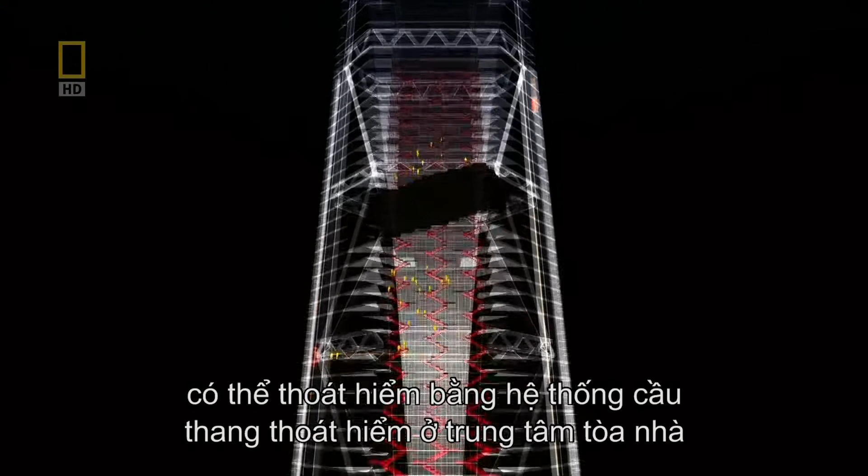In the financial center, people above the impact zone can escape via secure stairway systems in the central core of the building. But just in case, the architects gave them another way out. We took the observation elevators, which are running up the corners of the building, and actually allow those to enter the office building at every 12 floors. So in a way, it becomes a sort of a last resort lifeboat.

So in case the core itself is disabled, a lot of people's instinct is just to try to go down. But what you potentially could do is go up and then go to the corners of the building, and the elevators are really protected by the corner mega columns, and then go down. If they still can't get out, they have yet another way to survive.

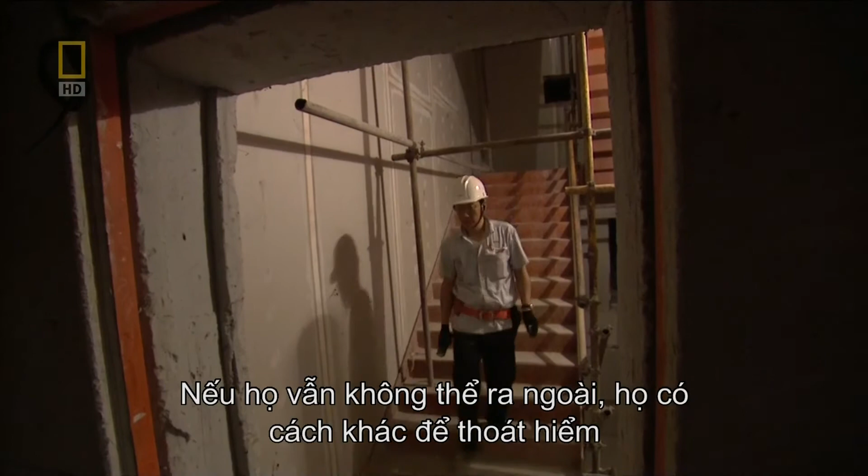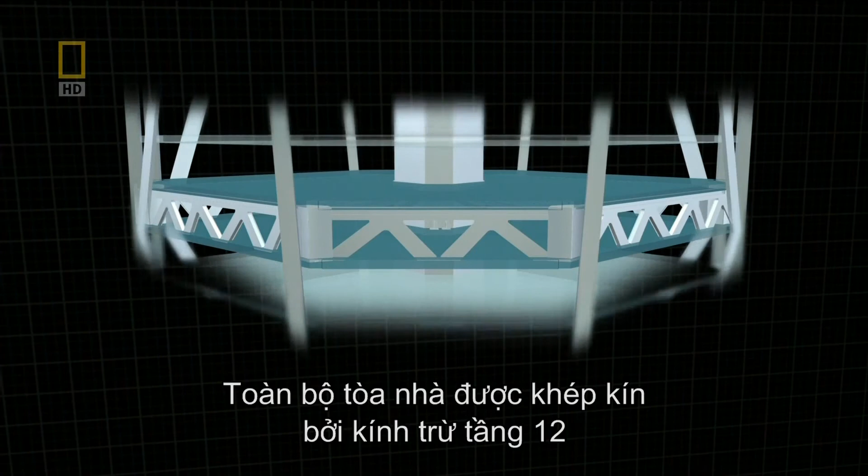This is floor 78, one of the specially designed refuge floors built every 12 levels. Deputy Manager Bernie Wren inspects its construction, keenly aware of the role this room might play in any emergency. These rooms are designed to let people take refuge in if there is ever a fire or an accident. The whole building is enclosed by glazing except for the refuge floors. On these floors, there will be normal windows instead of glazing so that people can get fresh air while they wait to be rescued.

And that's not all. These refuge floors are wrapped in specially thickened, fireproofed steel. People escaping a fire or a terrorist attack can make their way to one of these floors, knowing they have a greater chance of survival. And the World Financial Center's modular design could also save lives. If any part of the building collapses, the steel and trusses linking the modules should carry the load and keep the building upright. So I think maybe it could be said that the Shanghai World Financial Center is perhaps the safest tall building on the planet.

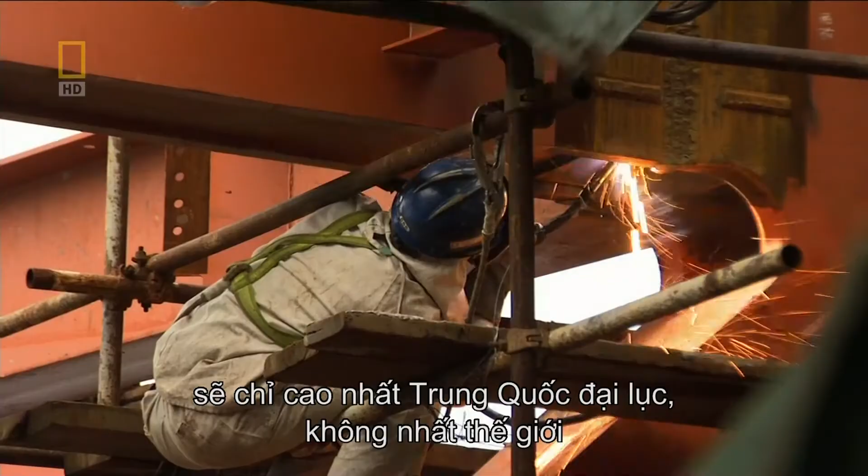When it's finished, the Shanghai World Financial Center will be the tallest building in mainland China, but not in the world. Even at 492 meters, its top floor will be 16 meters shorter than Taipei 101's spire. But that doesn't bother Bernie Wren. The other building is higher only because of the antenna on top. But this building will allow people to walk at a height of 492 meters, which is much higher than people can walk in the other building. For me, 492 meters is a record.

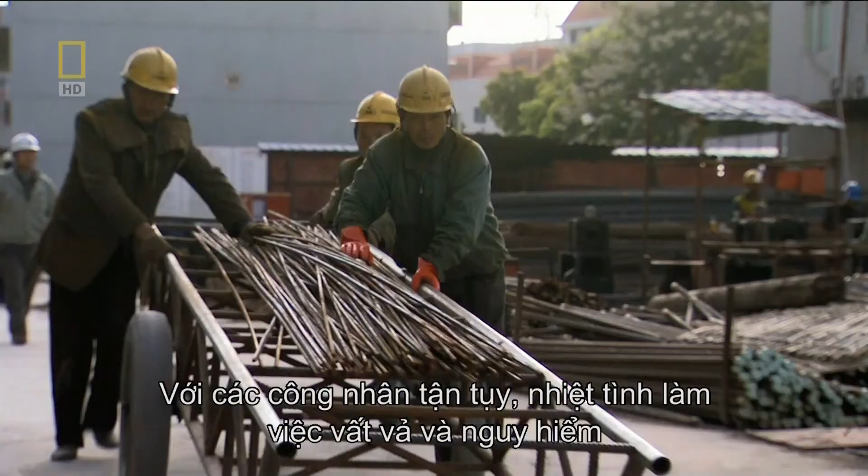Even before it's finished, the Shanghai World Financial Center is already a soaring tribute to Shanghai and a signal to the world that China is the rising power of the third millennium. But for the teams of dedicated, courageous people who have worked so hard and risked so much, this megastructure will always be more than record-breaking kilometers of concrete, glass, and steel. The Shanghai World Financial Center will be an icon. We hope that it will represent Shanghai.

I'm happy. It was a relatively dangerous project to do, but it was quite well paid. I heard the Shanghai municipal government is going to build a 120-story building. I hope next time I can do my part on that one. You look at it and you say, wow, right? It hits you right away. So much more so than your usual high-rise building. I think it's an exceptional building.

Soaring tall, in spite of financial disaster. Built to survive the relentless fury of nature and of man. An icon of beauty, power, genius. The Shanghai World Financial Center renews our faith in humanity's drive to overcome challenges, recover from tragedy, and keep on reaching for the sky.